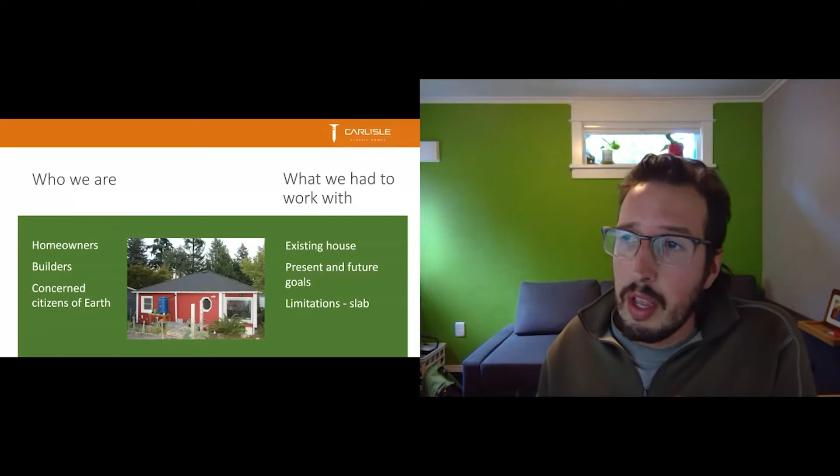And how we did it was slowly. We spent a very hectic 2019 summer, and some of the aspects of the project still linger today. It was primarily an exterior remodel, which allowed us to modify plumbing, electrical, window placement, earthquake retrofit, and improve drainage.

Through my involvement with Passive House, I like to think of better buildings through the lens of passive house. So these 5 principles are always kind of top of mind: thermal insulation, passive house windows, adequate ventilation strategy, airtightness, and thermal bridge reduced design.

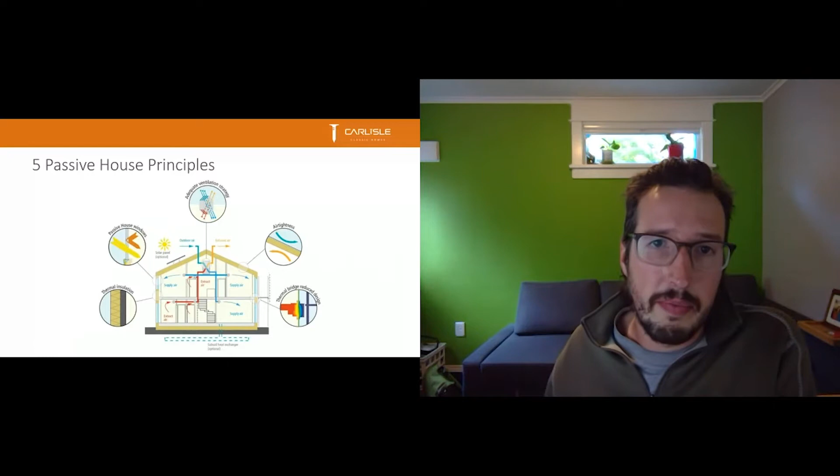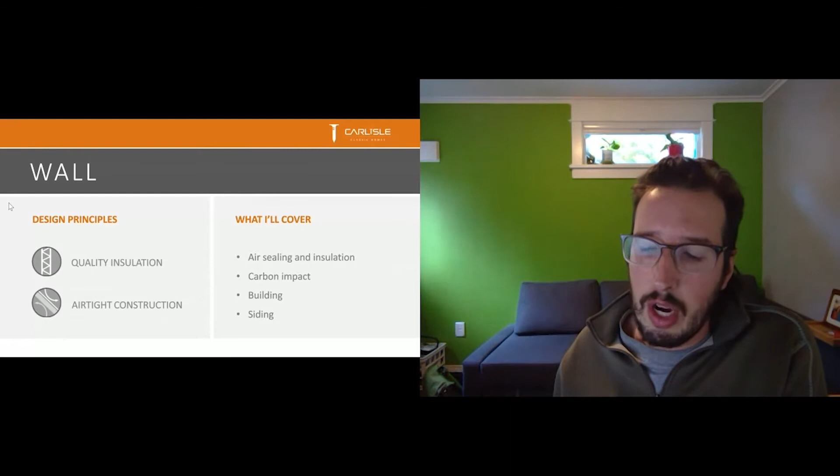So the wall was kind of primarily what we focused on. The scope of our remodel went from the slab all the way up to the top of the top plate. We'll walk through this. The aspects of quality insulation and airtight construction were very important here. We'll cover air sealing and insulation, carbon impact, building, and siding.

So we have a continuous air barrier from the slab to the top plate. Above the top plate is what I'll talk about in a bit. The connection uses Viscon, which is a liquid applied air barrier from 475. We used pretty much all of 475's suite of products here.

That air barrier transitions from the existing slab up the shiplap to about the second course of shiplap here. And then our Mento 1000, which is out here, gets fastened directly back here. It's stapled kind of backwards and upside down and then taped over top. And then when we add the insulation, we can fold it all the way over that detail. So our air barrier transitions to the outside of the wall assembly.

So the carbon impact, we used a lot of Gutex. Gutex is an insulation made of wood fiber. So it's reused, or it's a wood waste product pressed into a tongue and groove board. And the tongue and groove nature of it adds a lot of air tightness and makes the product really easy to work with.

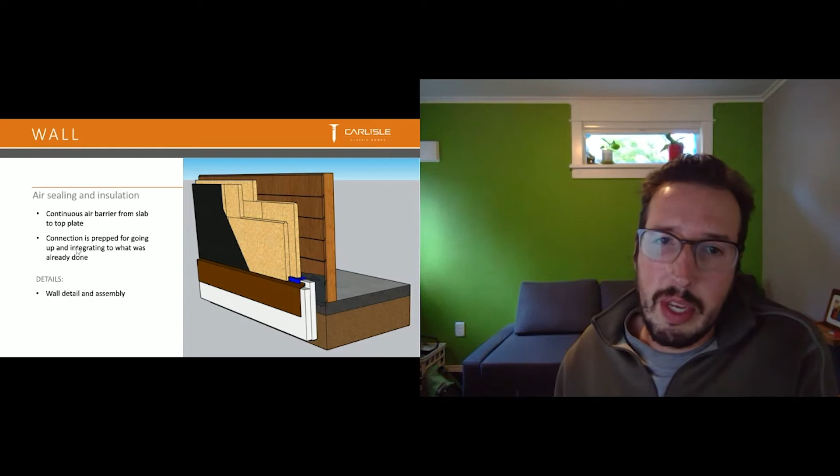And then the details allowed us to reduce the use of EPS to below grade. So EPS was chosen because it has a lower carbon impact as far as foam goes, but we still wanted to limit it. And then we went with a really simple design. Most of the house, we really liked the layout. So we minimized framing. In most cases, made windows smaller if we were reframing windows.

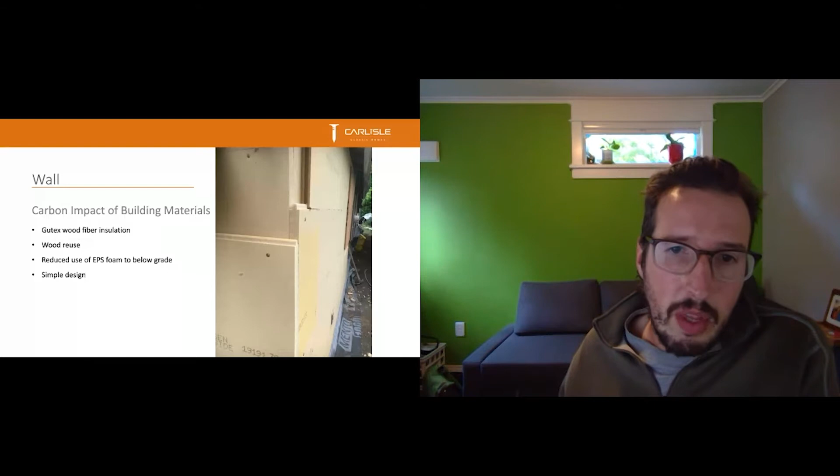So the building, again, we used the Gutex. We like that it has a great firmness, so it's not compressible, versus some like mineral wool which is a little harder to work with and get everything to plane out. Gutex, you can press hard against it. We were able to install the Gutex with just a single cabinet screw on each panel, and then the rain screen battens kind of tie it all together and hold it in place really well.

So it's easy to cut and shape, versus the EPS, which has a lot of static and creates a big white staticky mess. This just gets swept up and put into the compost. And it's really lightweight and manageable, the panel sizes.

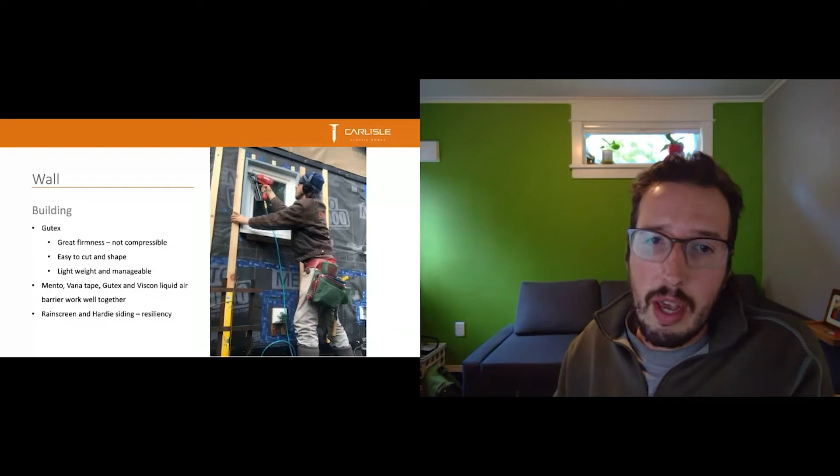We used the whole suite of 475 products, the Mento, the Vana tape, the Gutex, and the Visconn liquid applied air barrier. And then the rain screen and Hardie siding to add resiliency. So the siding, we just did a lot of really good flashing details. And then the 3/4 inch rain screen will add ventilation, so the wall can dry out because it has a very low heating load in the building.

So we want to incentivize moisture to leave the building and be able to drain out and either rise up with the air current or fall down with gravity. And the Mento 1000 kind of works like a Gore-Tex jacket in that way.

And then we have the 6-inch Hardie lap siding, which gives us a little more fire protection. It's also good for the long term. The paint is going to hold on it really well with the rain screen behind it, so it's not going to get a lot of moisture trapped in there. And then we used cedar trim for all the corners and window trim because it's a local product that has a long history of working really well in our area.

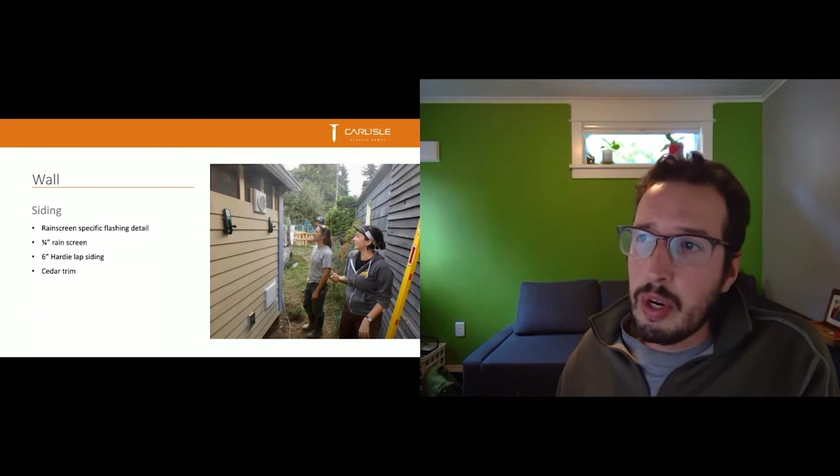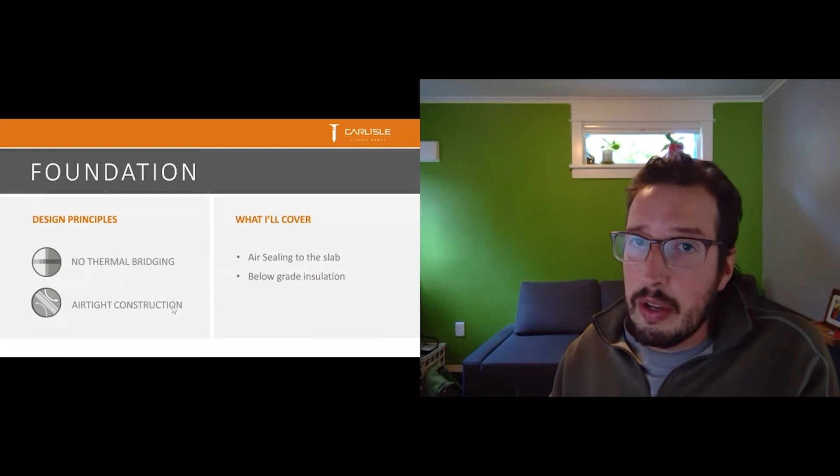So the foundation, again, these passive house design principles of no thermal bridging and airtight construction. So we did a lot of air sealing around the parts of the slab we could access, and then below grade insulation. So here's what the detail looks like from the start.

So we brought the EPS a couple inches above the slab, which allowed us to fasten into wood versus the old concrete. In some spots we had a footing, so we had a lot of area to fasten the foam to. Where we just had the slab that didn't have a footing, we found that concrete to be really brittle. So holding the EPS up a little higher gave us a good way to kind of securely fasten it.

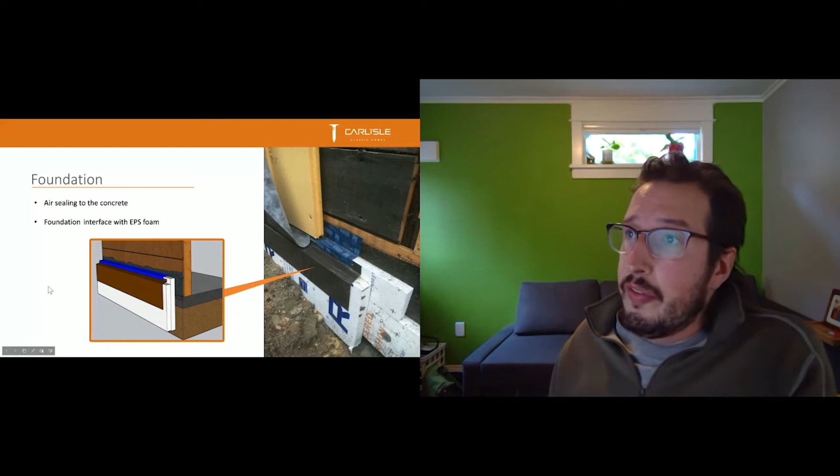So, foundation - below grade insulation. We have a front porch and a back porch, and we wanted no thermal bridging from either of those. So it involved doing a saw cut a couple inches back, jackhammering all the concrete out, adding the foam in, and then bringing our concrete right up to that level.

As well as putting in some drainage near the footings - we also found that our house was partially built on a septic tank, which seemed like it had never been used. As we were doing some details in the back of the house, we found this layer of concrete that just seemed to go and go and go. It was about an 8-foot by 5-foot tank, so we were able to cut that all up and reduce that thermal bridge with more foam.

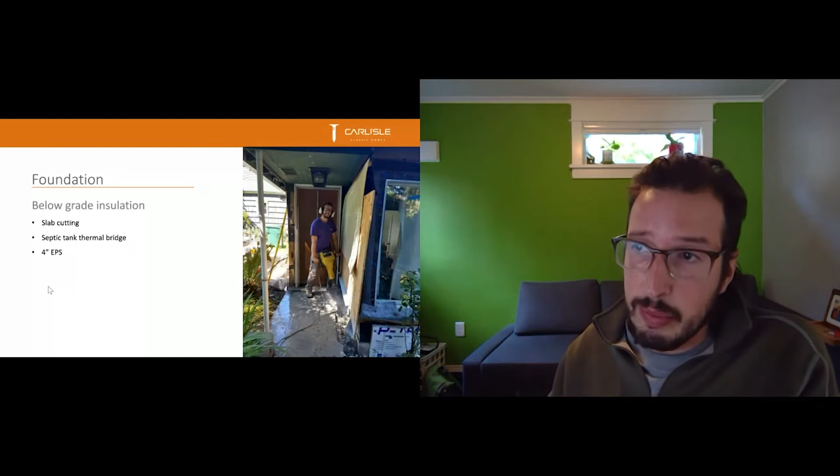So the windows and doors - superior windows is the design principle here. We'll talk about Indow windows and installation, triple pane tilt-turn windows, and the kitchen door. I'm the local dealer in Seattle for Indow windows - it's a window insert that kind of presses right into place like Tupperware.

We like the placement and size of most of the windows in the house. Large south-facing windows bring a lot of light into our living room, dining room, and kitchen. The north side of our house has bedrooms with northern-facing windows that were downsized and moved upwards in some cases, to give us views of the trees in our area rather than the neighbor's fence right outside the window.

These Indow products are made locally in Oregon, custom built to fit the dimensions, even the really big windows. As you can see here in our photo, we have some bigger picture windows, and they reduce noise. In this case, we went with some that have a UV protectant on them, so they'll reduce UV light penetrating into the house that would fade any furniture or flooring. And they also stop drafts.

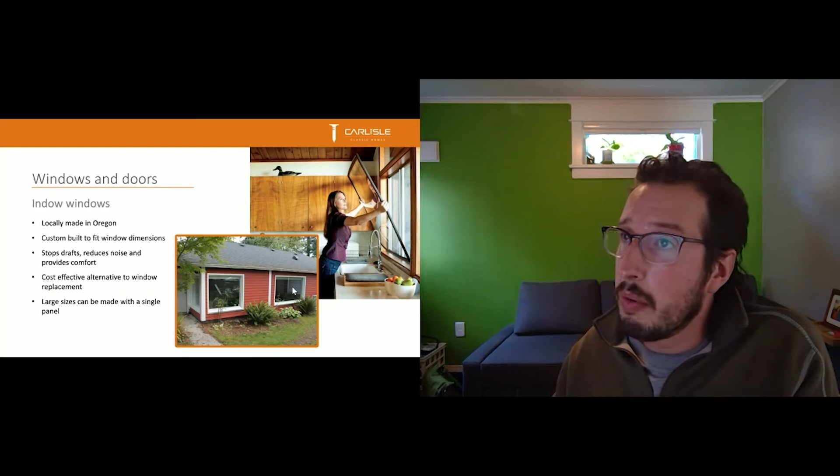They're also customizable. We had this octagon shaped window that our neighbors kind of recognized - if we meet someone on the street in our neighborhood, we just say we're the house with the octagon window. So we didn't want to get rid of that, we wanted to preserve it. We were able to redetail the opening, put the double pane octagon window back in, and then have a custom template done for the Indow window so it could go on top of it.

This also allowed us to shift the plane of the window panes out further, which gave us more room for a window sill, and also to accommodate the Indow windows and blinds.

For the operable windows, there were only 5 operable windows in the house, so we went with European tilt-turn windows. Other than a long lead time, we were pretty impressed with the product. We can tilt them open to have some ventilation, which will be safely locked open - you can't open it any further than that orientation, or you can turn it open like a door for egress. And they have a multi-point latch system, which gives them a superior seal.

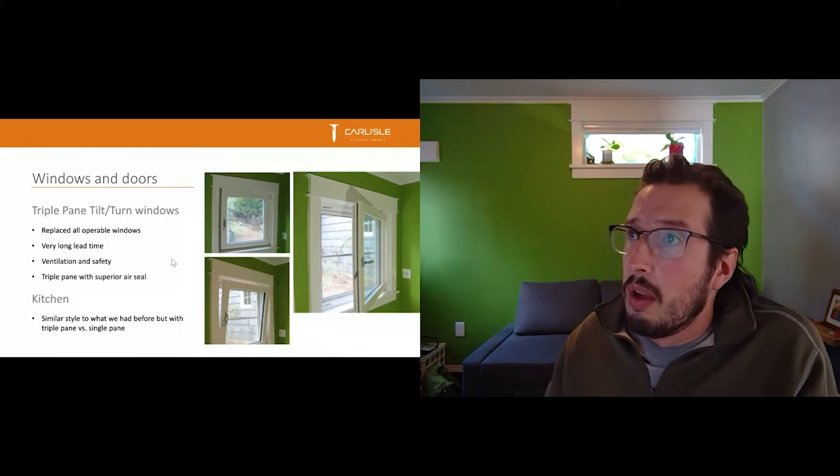So the next thing, the other component we upgraded was the mechanical system. Our design principle here is ventilation with heat recovery. We'll talk about cutting the gas line, ventilation, HVAC, and the hot water tank.

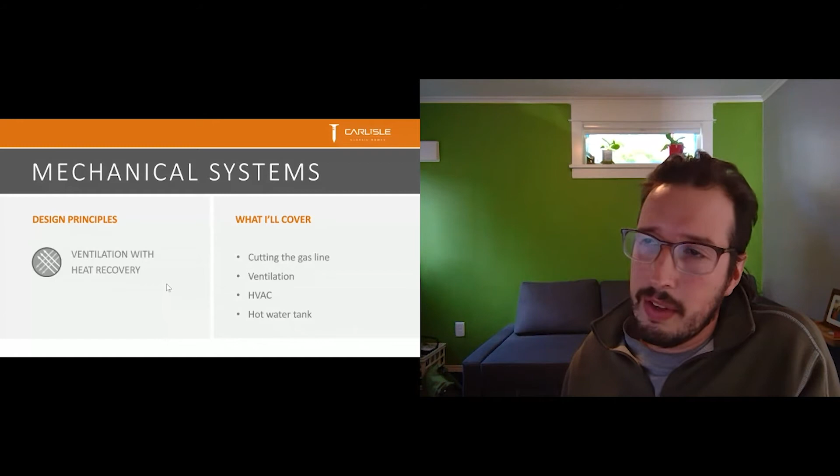One of our main goals to reduce carbon was to get off fossil fuels and get closer to being able to be on solar power at some point.

PSE was able to remove the gas line at no charge. There was a couple week lead time, but they did a good job working around our schedule. They weren't able to remove the meter and cut the gas line as quickly as we wanted, but they accommodated us by removing the meter and leaving the stub out here, which allowed us to continue our building details.

That kept the project moving forward. This should account for some annual utility savings just in service charges, plus having two different bills streamlined into our monthly bill management.

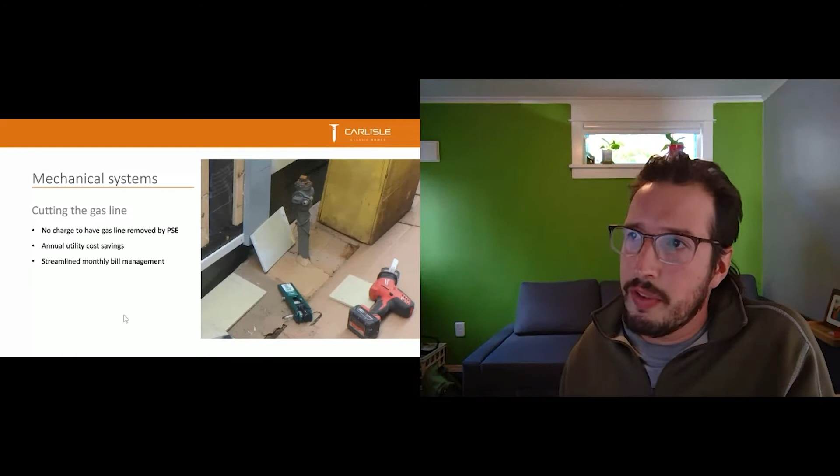For ventilation, we went with the Lunos fans, also from 475. This is a great strategy for remodels. One fan, this pair of fans, work in concert.

One will intake for 70 seconds while the other exhausts for 70 seconds. The one that's exhausting is charging up this ceramic core, and then when they switch directions, it's bringing in air through that pre-tempered core.

They've been great. Our house is only 980 square feet, so we probably could use two of these. But what we're thinking is in the future, maybe putting a second story on the house, and if we do that, we want a ventilation strategy that ties both floors together.

For now, this ventilation strategy works really great for just the two of us living in the house, me and my partner Michelle. But in the future we might want more ventilation if we have more square footage and potentially more people living here. They also filter the air with a MERV 5 filter.

It sounds like Lunos is now giving an option for a MERV 16 filter, which should be an asset for more smoky summers if we have to deal with more forest fire smoke.

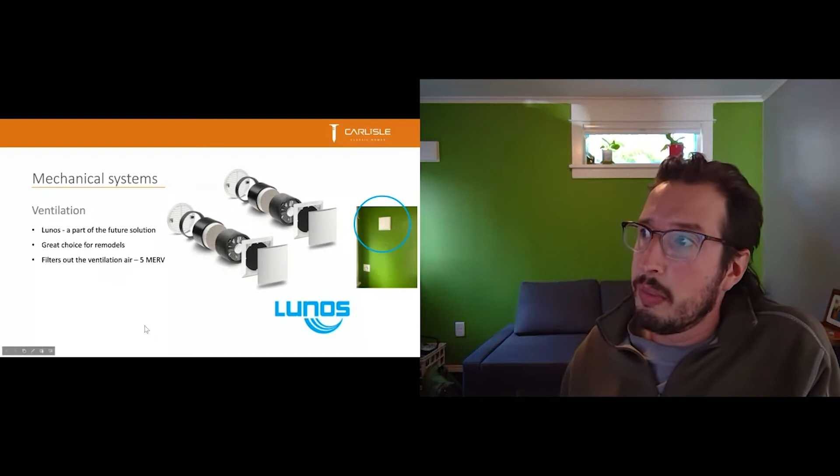For the mechanical system, we had a 95% gas furnace that was ducted to all the rooms in the house. Because we put on three inches of exterior insulation, the house is really well heated with just one single head from a heat pump.

This unit serves our living room, kitchen, and can shoot some warm air into our bedroom. It really meets our needs very well.

If we do the second story addition, we can tie into the exterior unit and just add more heat pumps. We tried this out knowing we could also tie in another unit if needed, like a ducted unit to some of the other bedrooms if they weren't warm enough. Our experimental stage right now seems to be working really good.

It's really warm in the house, and it also provides cooling. Cooling, you'll see later, is not an issue.

The rest of our slab is uninsulated, so we have no problem with cooling in the summertime. In fact, one day it was 93 degrees out and it was only 77 degrees in our house without the AC on.

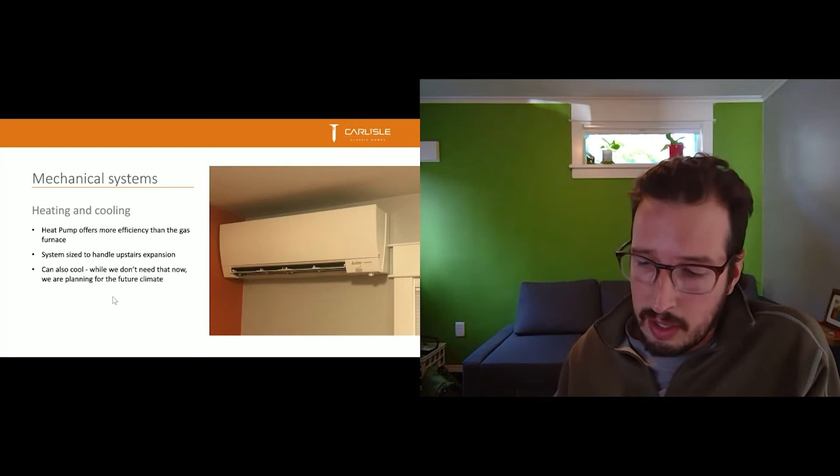For the hot water tank, I worked for a couple of years doing energy audits for the Community Power Works program and saw all kinds of water heaters, but I went home every day to my water heater, which lived in what we called the shed of shame.

Our water heater was literally built into a shed outside, and to make matters worse, they ducted the dryer into that combustion room where the gas water heater was.

We were thrilled to get rid of that, and we decided to just go with a standard electric tank. There are some great deals out there for just a stainless steel tank, and we didn't want to overthink it too much—we wanted something easy to install ourselves.

So we just switched the plumbing around. It works great for the two of us, and we might upgrade at some point to a fancier hot water heater, but for now this worked really good.

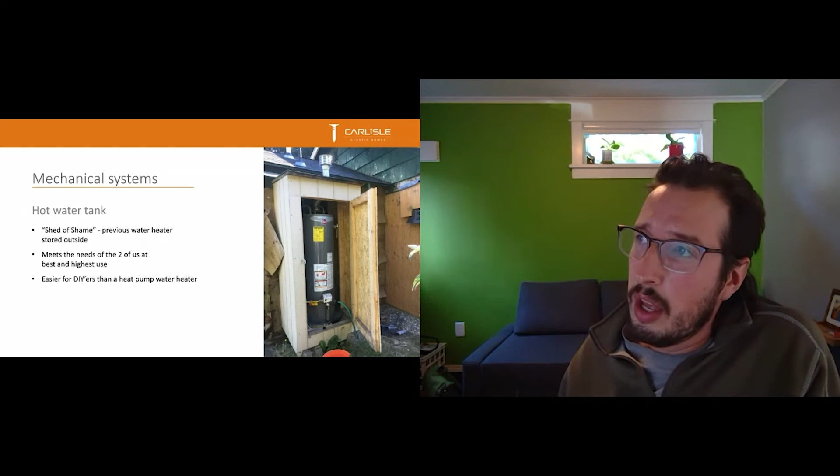We didn't do a full life cycle analysis, but carbon was certainly a big factor in a lot of our decision making. The shingles, the house was in really rough shape and needed to be resided. This is just kind of accounting, with half the weight being carbon, so that had an impact. We had to take a dump truck full of shingles to the landfill.

The Gutex insulation accounted for making up a lot of that carbon impact, and that was one reason we went with 2 layers, since we knew we were going to have some deficiencies in the slab. We wanted as positive a carbon impact as possible, which balanced well with having a more efficient building. So we went with 2 layers of the Gutex, and repurposing the rain screen battens helped a lot. The EPS foam impacted us a little bit, but we tried to use as little of it as we could.

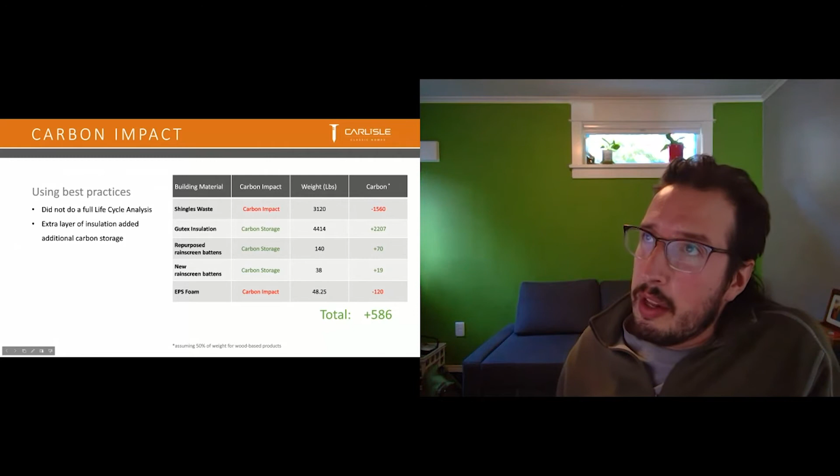Looking back through the passive house lens, we wanted to balance being low carbon with having the best building. I did some WUFI modeling, and here we can see two scenarios: one where the house meets passive house standards and one where it doesn't.

With the uninsulated slab, our heating demand up at the top is pretty high. If we put R25 over the slab, it brings us down into a reasonable range. But right now we would have had to raise the heights of all our doors. R25 insulation is pretty thick, so we would have had to tackle that all at once, making the project a bigger undertaking. For now, we're content with focusing more on a lower carbon building rather than one that meets passive house standards.

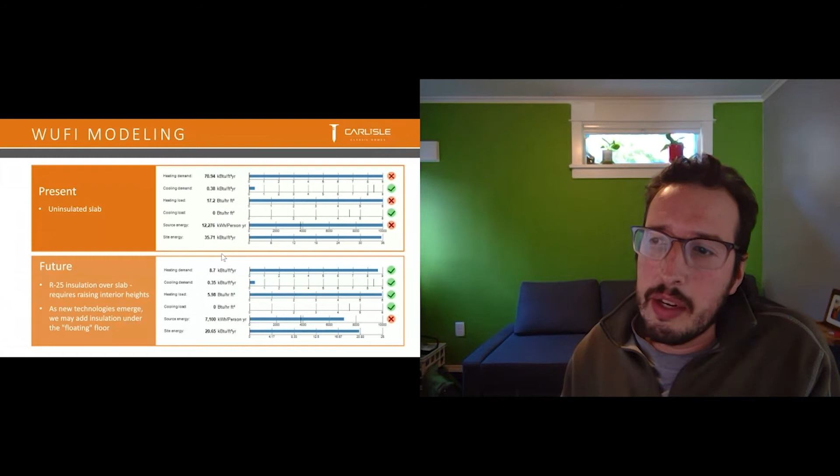We do have a floating floor, so we might be able to add a half inch or three quarter inch of material in the future under the floating floor. But for now we're focused on finishing up what we've already done while thinking into the future.

Into the future, we're thinking about potentially a second story, but again, there's only two of us, so we're not sure we need the space. At some point we want to bring the attic into conditioned space, whether it has living space above it or not, then adding a PV array and a ventilation system that would tie into the whole building, both floors.

In summary, when considering carbon impact, it is important to use low carbon and carbon storing materials to balance out the impact building has on our environment. We could not have done this without all the collaboration from people in the Guild. This group exemplifies community and pushes the envelope.

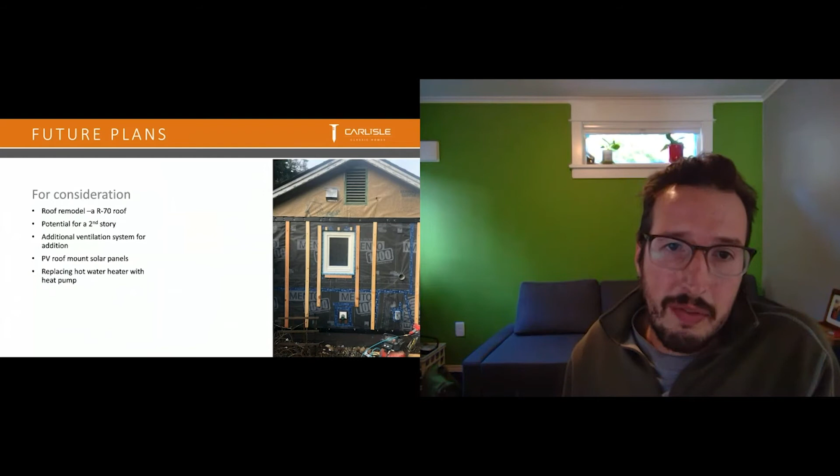Thank you, and I will now take questions. All right, we have three questions so far. The first is from Green Home Solutions.

Does anyone know what the carbon footprint of HardiePlank is? Seeing as it's cement and chemicals, I've always been curious of its carbon impact. Yeah, I haven't looked into that. I know it's higher, but it also has a lot of longevity, more than other siding products. So that was kind of a trade-off we made there. Maybe after the presentations, when we're talking at the tables, if somebody else has more information, they could share that.

Next question, Tom Balderston wants to know what is the bug barrier between the EPS and the wood on the rain screen. Yeah, so we did do a Cor-A-Vent on the top and bottom of the rain screen. There is some Mento 1000 that is exposed, but I don't think bugs are going to find that too tasty. The Gutex is entirely covered, so there's no way for bugs to get up inside there.

He actually said between the EPS and the wood, and then I inserted the rain screen, so I'm not sure what he means if that's something different. Well, between the EPS and the wood there's the Visconn liquid applied air and water barrier, and above that there are layers of flashing and tape before we get to the insulation detail, where there's Mento 1000 that would encapsulate the wood fiber Gutex insulation. So there's no direct path to get to the wood. Tom is clarifying that his thought was that bugs could crawl through the foam to the wood structure.

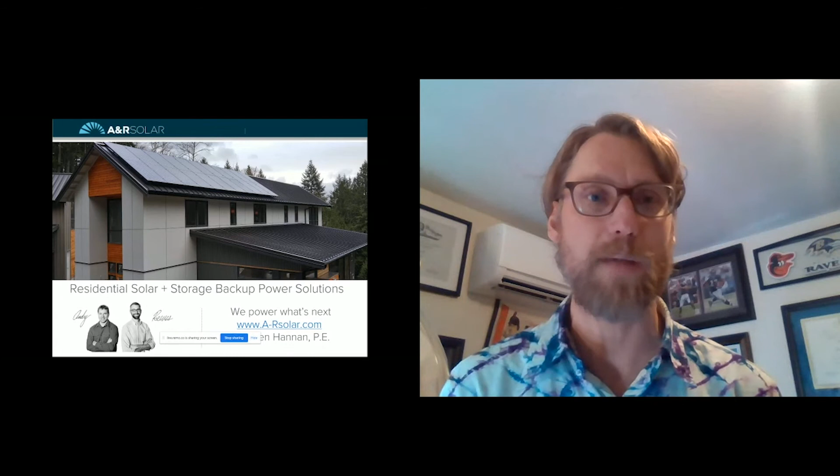My whole career has been really sustainability. Whether it's solar energy design, renewable energy assessments to look at wind, solar, or tidal. I've also done a fair share of environmental cleanups, fish habitat design and restoration, and energy efficiency audits. I've worked on the seawall project downtown. That was kind of a habitat and civil project that was pretty interesting. And here at A&R Solar, residential solar has been my focus, although I've done marketing to help expand our commercial. So we do both residential, commercial, etc. In my undergrad career, I did research on solar energy and hydrogen fuel cells.

And third on the list, what we'll hear more about today is our zero energy home. Zero energy because it's 100% solar electric. So everything in the home is run off solar. And then we also have a rain barrel to water our plants all summer. We use some of the water for rinsing our dishes. We'll actually fill up bottles and use that in the house and water our plants. So we offset our potable water.

And then some of my hobbies are similar to Brian's, both like outdoors, skiing, hiking, swimming, and I also play drums.

To show you some of the energy efficiency work I did in Alaska, I appreciate you guys talking about the Native American lands that we were on. These are two of the energy efficiency audits I did, in the native village of St. Michael's in the lower right, and the upper left was the Yakutat Tlingit tribe. That's their high school. So what brought us there was, they had very high energy bills, a lot of condensation, which resulted in mold in some houses. In St. Michael, they prefabbed homes in Washington and shipped them to Alaska. So they just didn't have the correct R values. And the heating systems weren't built that way. So we really worked on prioritizing what made the most sense for energy efficiency.

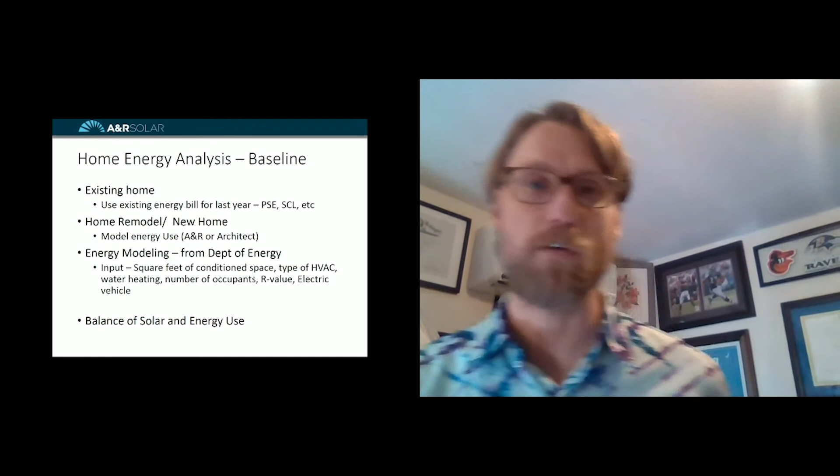Brian talked more about the high level impacts of energy efficiency to how to really seal up the home. I want to talk about the low hanging fruit, the things that are easy to do. Some of them are free, just changing your habits, like setting your thermostat correctly, lowering your temperature a few degrees in the winter and raising the temperature in the summer. And then only heat the rooms that you're in. You don't need to have rooms that you're not going to be in to be heated and cooled all day and all winter.

Then it's eliminating ghost loads. If you've heard about the Kill A Watt meter, you stick it in the wall and plug things in. And I've done this with my laptop. If you plug it in and there's no laptop plugged into it, it still draws 30 to 60 watts of energy continuously. Well, if you have your laptop plugged in when you're not using it year round, that adds up. And then also your cell phone, if you don't even have your cell phone plugged in, there's the little pack on there that still draws energy. Your TV has a light. So those are all ghost loads that, 1 to 5 watts times 24 hours a day times 365 days a year, really add up. So that's how you eliminate ghost loads, is using a surge protector.

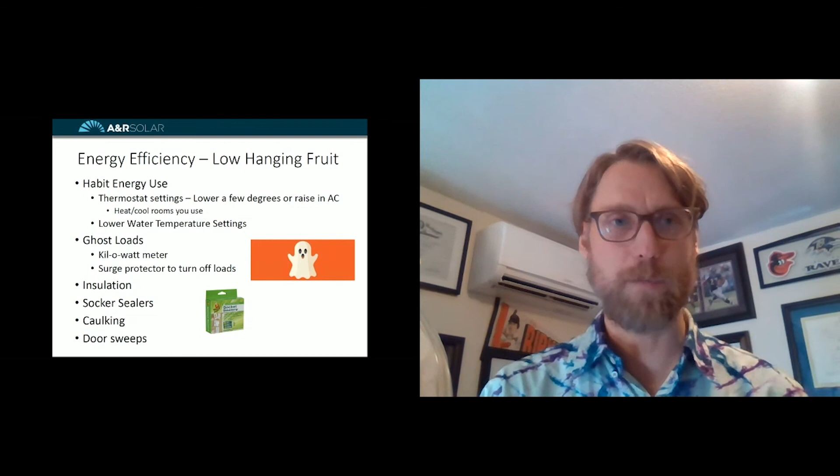You guys all know about insulating. That's an easy way to reduce what your HVAC load is. And a really cheap one is these socket sealers here. They're about $2 for a 20 pack, and you can do this for your home. It's a great COVID activity with the kids. All you need is a screwdriver, and it really helps seal your home. And it's quick, cheap, and easy. Caulking is also easy. A few tubes of caulk can really seal your home. And I'll explain what I did for my home to achieve that 100% offset.

So solar energy, your use versus your solar energy balance. So let's take a home with 20,000 kilowatt hours. That's a high energy use. 10,000 kilowatt hours is about the average in Seattle. But say you can only get 50% of that with solar. That's great. 50% is a really good amount of solar energy offset. But if you just reduce your energy by 30% with some energy efficiency, maybe your heating, and reduce that to 14,000, your solar can now offset 71% of your energy. So by doing energy efficiency, you can actually reduce how big your solar system is, thereby reducing your cost of solar and bringing that down, and trying to meet in the middle.

So it really pays to do both. It literally pays to go solar because of the federal tax credit of 26% this year, 22% next year, and then the energy you save over time.

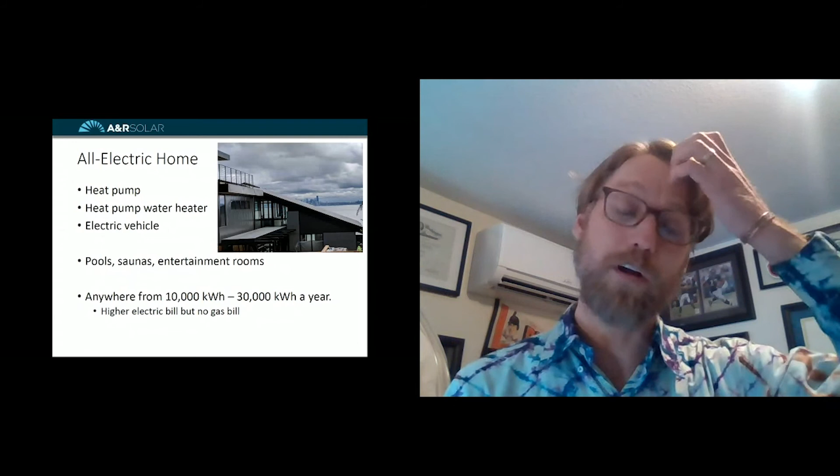We deal with a lot of different style homes. I look at hundreds a year, whether it's all electrics, some gas, new, existing, etc. A lot of the new modern homes are going 100% electric, but their kilowatt hours could be really high if they have a heat pump water heater.

An electric vehicle can add 3,000 to 7,000 kilowatt hours a year, which is pretty significant. When we said 10,000 was the average Seattle home, that could add 30% to an average home. With a 3,000, that's for 10,000 miles a year of driving equals 3,000 kilowatt hours. And some of these larger homes have the pools, the saunas, and entertainment rooms.

So, I've seen anywhere from 5,000 kilowatt hour use homes that are really low use. They do have some gas appliances, but I've seen average between 10 to 20,000, but I've seen 30 to 50,000 kilowatt hours a year. And usually it either takes a very large solar system to offset that, or talking about energy efficiency.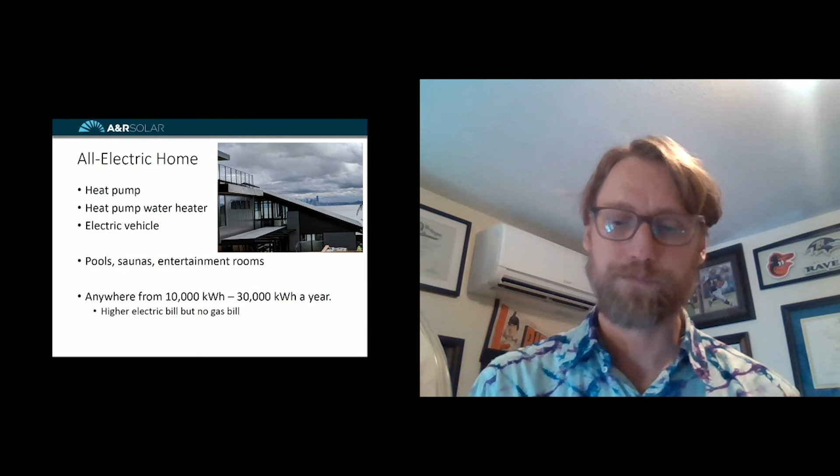So my house project, I'm on the corner lot. I maximize the solar energy there on the roof to match an inverter size. If I added that one little corner spot, I would have had to go to a larger inverter, which would have been a few $1,000s more just to add one solar panel. So it didn't make sense to add one more.

My system is a 5.4 kW or kilowatt system. It's about 5,000 kilowatt hours of energy. My tax credit for this system was about $8,000. So then I used that money to fund my HVAC system behind me. I got a heat pump, and that really helped bring down my cost dramatically.

So with maximizing my existing home, I was only able to offset 60% of my energy, which was great. My energy bills for about half the year were zero, and then they were reduced in the winter. Now I just have the $5 base load all year, the base bill, but I have no energy use. And what I did is listed in the home efficiency section.

I did the heat pump. I insulated the attic and my water pipes. I lowered my hot water temperature on my water heater. I caulked my interior and exterior, and then I also added a HardiePlank exterior envelope like Brian did. I built it right on the existing T111, so there's a little air gap there, which actually helped seal and insulate the house. It is very comfortable now. So now I have 100% energy offset.

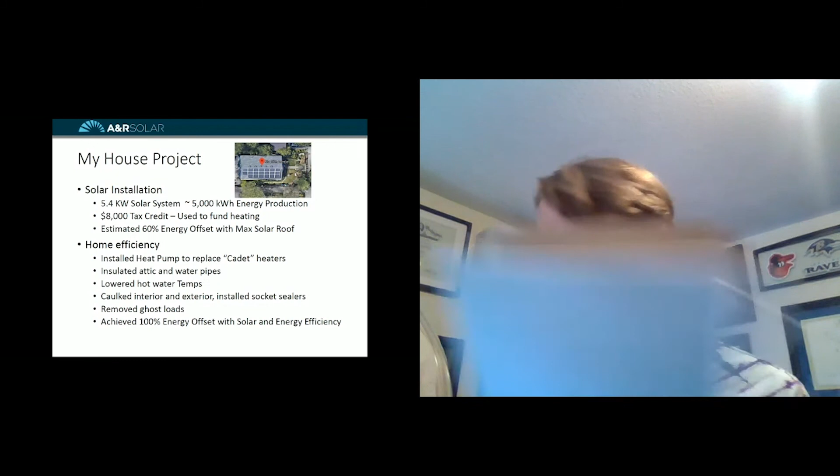So first I want to switch over to some of the modeling. So I have that pulled up on my screen here. So we use this home energy saver from the Department of Energy. You put in things like how many stories, how much your conditioned space is, your R values, your roof insulation R values, what type of attic you have, etc., your windows.

We also put in what type of refrigerators, your water tank, your heating, cooling, etc. And this gives us an output to determine how much kilowatt hours you might have on a new home. So this is how we get a baseline, and it doesn't include plug loads like TVs, entertainment centers. So we have to add that in after. So that's one way that we model.

This is my home here. You can see the HardiePlank on the side here, and the solar array, and you can see the HVAC ductless heat pump heat exchange outside. So by doing solar and a heat pump, I found that was a really efficient way to offset all of our energy use. So it worked out really well.

Some other things I know that you are all interested in, you're wondering about, what we do for low income housing. So here's one of our low income housing projects that we put a nice size solar array on. This is a pretty good size one. In Bellingham, we did a large commercial array. And we've also done schools, which I really appreciate, solarizing schools.

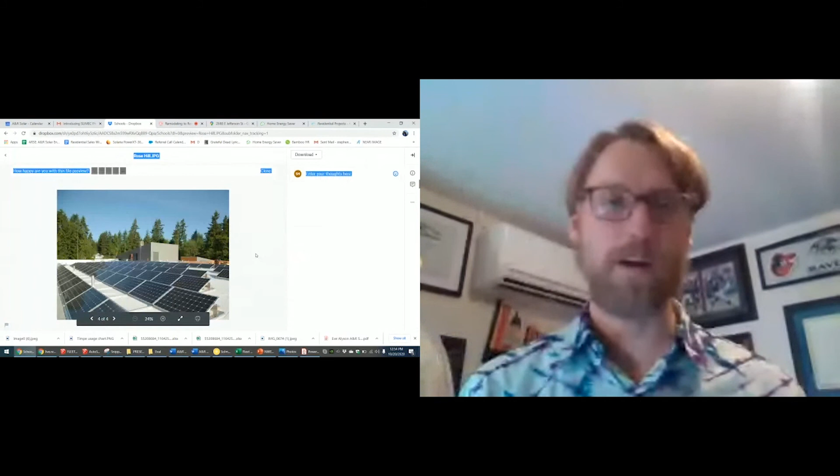It's a long-term investment for a school because one of their highest energy costs is heating and cooling and their energy costs. So if they can offset that with solar, it really pays to have a long-term 30-year investment. I'm a fan of having them in libraries or any public building that has taxpayers' money to fund it.

And so here's another elementary school, nice array on the metal roof. We can clip right to the metal roof. So it's a really nice way to offset their maintenance costs and their energy costs. Then we've also done some community solar projects.

All over the state, this is where you can actually buy a portion of the community solar. Say your house is really shaded and you can't put solar on your house, it doesn't make financial sense. Well, you can actually buy portions of these community solar projects to do your part and have some offset energy.

These types of projects sell out their credits quickly. If you could buy a solar panel, they sell those out very quickly. It was amazing, the one in Snohomish County we just did for the Snohomish PUD sold out in a few days.

I just want to show you some of our other projects. We do anything from a small size home, people's garages, garage and home, and ground mounts. These are photos of a lot of our all-black modules, which is really nice for HOAs.

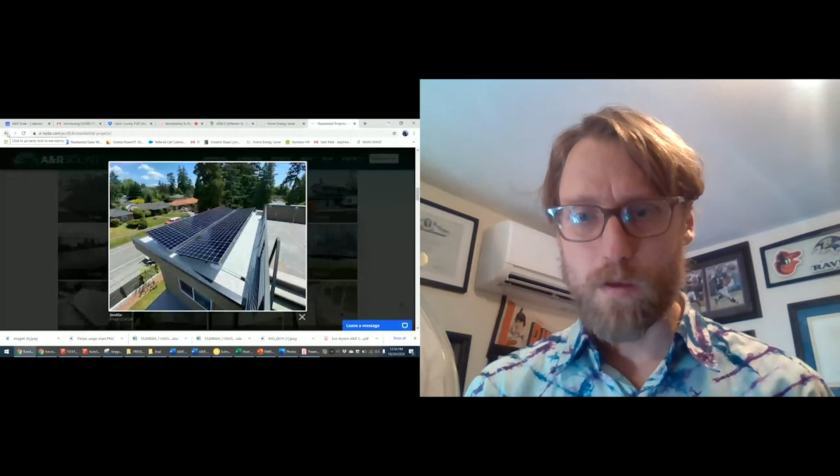So I'll come back to the PowerPoint here and finish that off, but I just thought you'd want to see some projects. It's a good way to kind of visualize things.

As I said, we do also power walls. TJ went into detail about this, but this is just showing a triple power wall mounted on the garage wall. Some new construction here, flush mounted, looks really clean.

On this roof, you can barely even see the solar. It is right there, really a clean look. It floats 6 inches over top of the roof.

So you actually get some benefit of not taking on that heat gain since there's an air gap between the solar and the roof. So it's not quite as hot in the summer, which is a nice added benefit. We don't really calculate the energy saved there, but it is noticeable in the summer.

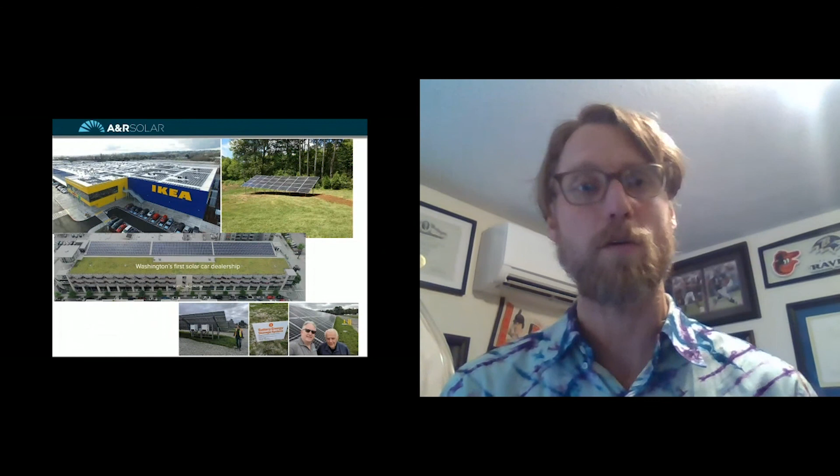We also did Washington's first solar car dealership, the Audi in UW, which has some SunPower solar modules on there. We did the largest roof array on IKEA. And then we also do some ground mounts and things like that.

So at A&R, we're happy to do assessments for your home or for your projects. Feel free to go to our webpage and talk to our welcome team. They're happy to take your information and talk you through going solar, and answer any questions you have.

And now I'll just open up to any questions you may have. So I'll go back to the main Remo screen and go from there. Thank you for your time and joining me today.